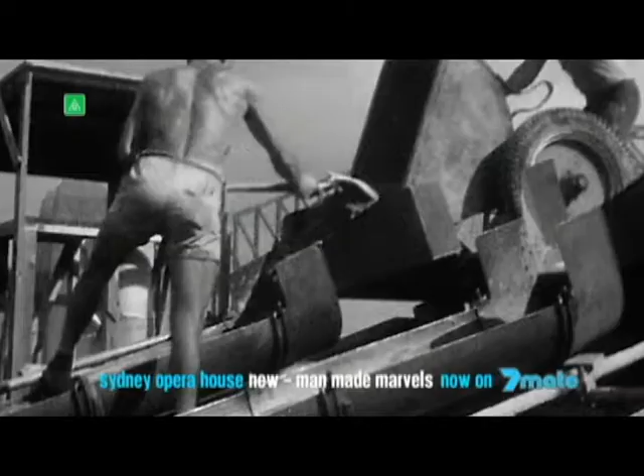Australia's Sydney Opera House, one of the greatest design concepts ever conceived. A shape so complex that it nearly can't be built. A construction process on the very edge of impossible. But the history of this building is more than one of concrete and steel. It is the story of a broken dream, a fallen hero, and a final chapter that is about to be unfurled.

Sydney, Australia, bustling modern super city, lifestyle capital of the world. Beaches, suntans, and a giant glittering harbour as the city's beating heart. But mention Sydney to anyone, and it's not this they think of. It's this, a building that both defines and is defined by the city that surrounds it.

It's awesome. Beautiful. It's gorgeous. A very good place for me. It's like some kind of alien bases or something.

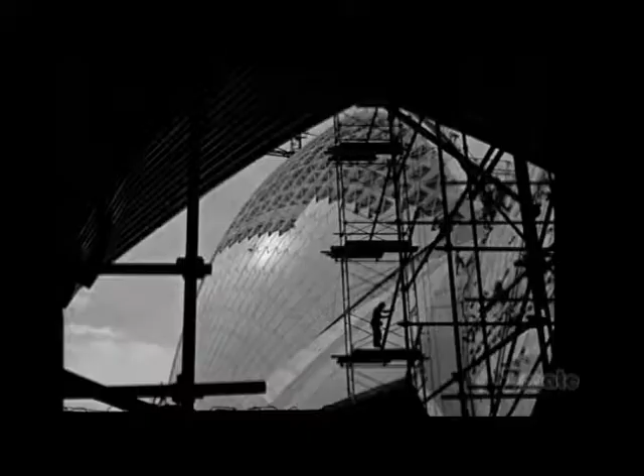Designed nearly 50 years ago, it is a building that rewrote the record books, changing not just the way we design buildings, but how we build them as well. Couldn't have been built at any other time. It actually extended the boundaries of imagination for architectural form.

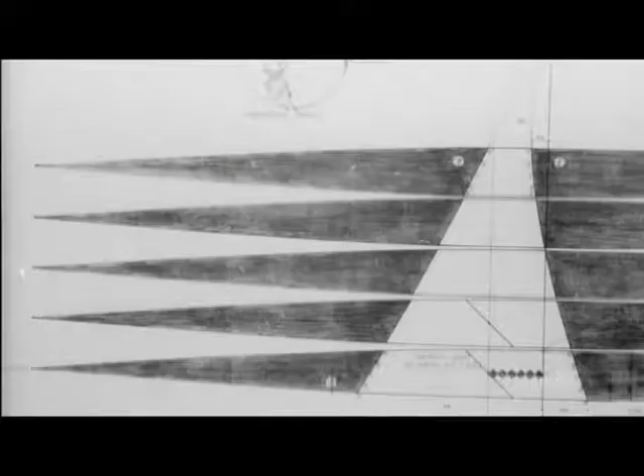The shells alone will take 150,000 man-hours to design. This is more than just an engineering riddle. It is an engineering nightmare. Yet from the most complex of problems will come the simplest of solutions. Having worked on that job, from then on, I always knew that I could solve the most complex of engineering problems. You just know. A solution that will change forever the borders of impossible.

Designed by Danish architect Jorn Utzon, the human story of the Sydney Opera House is one of triumph, drama, and heartache. Of challenging the very laws of nature. If he came up with a better idea, he had no hesitation of scrapping all the previous work. He wanted perfection. You had to create something like a sculpture which could be seen from all sides. It sits in a harbor with buildings of a square character, and you don't want to have the name Opera House written on it. You want to see this is an opera house like you see this is a church.

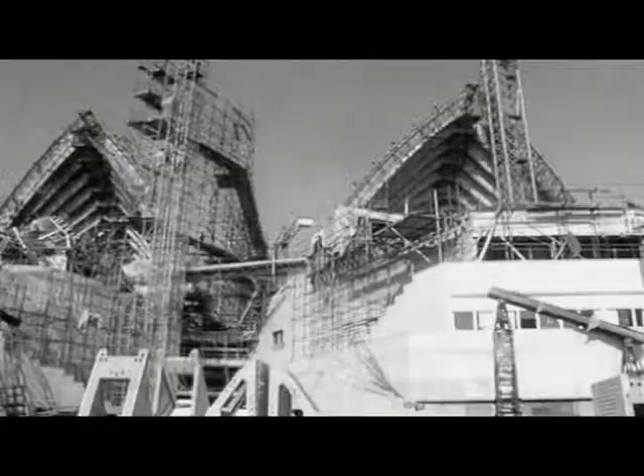But behind the story of the masterpiece is the story of the disaster. He wanted to do things one way, the government another. Budgets blowing out by 1,500%. Timelines stretching from 5 years to 14. And a visionary architect who doesn't just leave the building, he leaves the country.

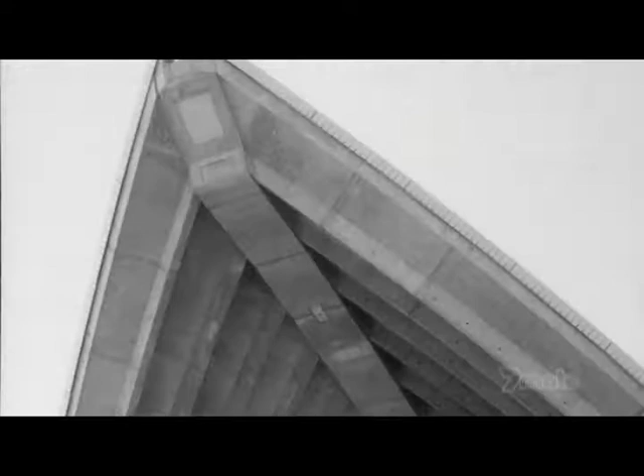Well, I wonder if you ever lose a child, if that ever goes. I doubt it. This is Jorn Utzon. There's in fact nothing I would like more than to come back and finish the opera house as it was conceived. And to this day, the mastermind, Jorn Utzon, still hasn't seen the building finished. That building was his life's work. And to be deprived of finishing it was, you know, it broke his heart.

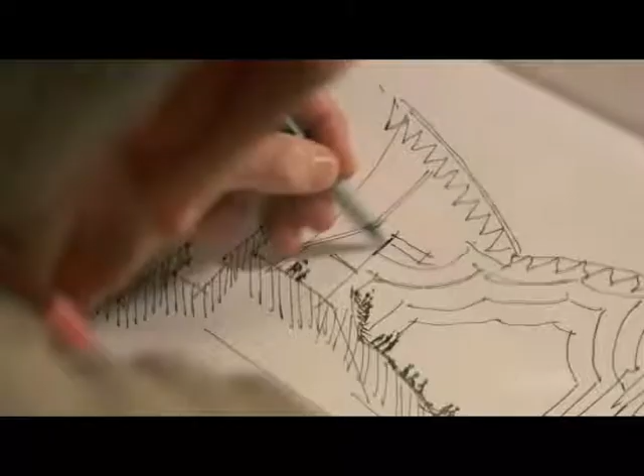30 years after their ruin, Jorn Utzon's broken dreams are about to be rebuilt. There were some compromises, and those, I think the time has come to fix those. Future plans coming not just from the man himself, but from his son as well. They asked my father, would you please consider coming back and help us with this problem? Jan Utzon, an accomplished architect in his own right, is helping to devise schemes that will see his father's creation flourish, not just for the coming decades, but for the coming centuries.

But who was Jorn Utzon, and what makes him so special? Architect Rick Leplastrier is one of Utzon's employees and close friend during the construction of the Opera House. To him, it's not just about design, it's about perspective.

Utzon had an incredibly good understanding of nature. He had a structural understanding of it. He also had the understanding of how we feel in its presence, whether it's on the flat plain of the sea or whether it's on the windy ridge or whether it's down in the dunes. He had an understanding of the feeling that impacts upon the human personality.

Consulting Sydney Harbour marine charts, and without having ever set foot in Australia, let alone the proposed construction site at Bennelong Point, Jorn Utzon develops his scheme. If you saw a list of all the stuff that's needed there, you'd say, how the hell can I solve this complex problem? But he said, no, we make a platform. The platform houses all the interstices of the workings, where the artists prepare. The top of the platform is where they perform to the public, and the roof is the shelter. The benefit of this approach is that the building does more than just fit the landscape. It becomes the landscape.

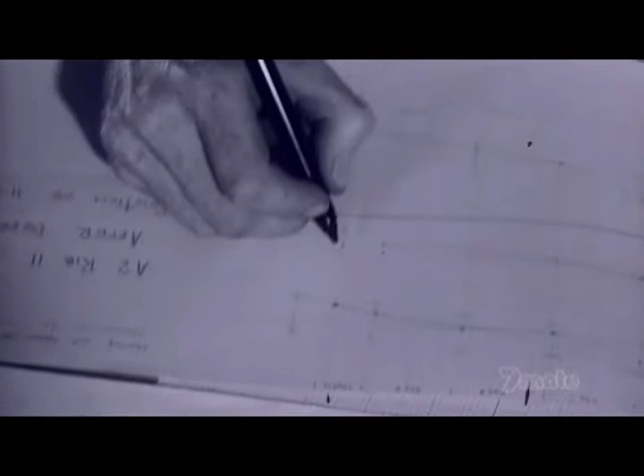John Nutt's team of engineers are a group of remarkable maths and physics wizards charged with giving structure and strength to Utzon's amazing design. The whole thing in this building is that architecture, engineering, construction all merge into one. So you never quite know where the boundaries of one are. And that's one of the aspects of great architecture.

Unlike a regular building, where strength can be found in simple straight lines, vertical walls and geometric angles, the sails of the Sydney Opera House are a maze of curves and complex geometry.

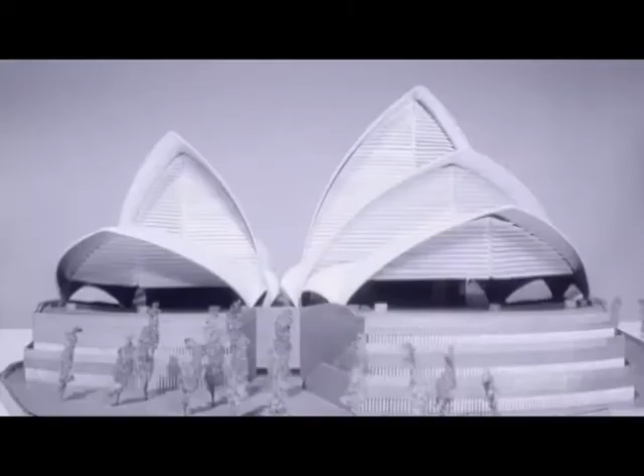The ideal form for the Opera House is some kind of shell structure. But making one that's both 20 stories tall and strong enough to hold its own weight has simply never been done before. On this job, there are a number of things that didn't work as far as the curvature is concerned.

For instance, if you look at the ridge lines, there's a ridge line and it's a very sharp one. Shells don't like that. When you look at the shells, they come down and they're sitting on points. Didn't like that. If you look at the shells, he's having very large curvatures where the weights were heaviest, and it doesn't like that.

Engineers are in a catch-22: how to make the sails of the Opera House light, elegant, and strong? The answer lies not just in materials, but in geometry.

A shell structure is like an egg. If you want to break an egg, you tap it. But you can actually squeeze an egg really quite hard without breaking it. Because all the forces are in that double curved shape, it doesn't break.

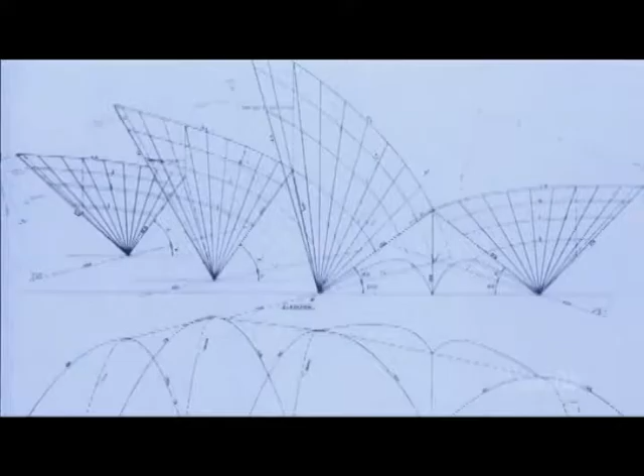The curves of the early designs are incomplete, leaving them vulnerable to collapse. Over a period of 3 years, nearly every geometric trick in the book is tried, tested, and failed.

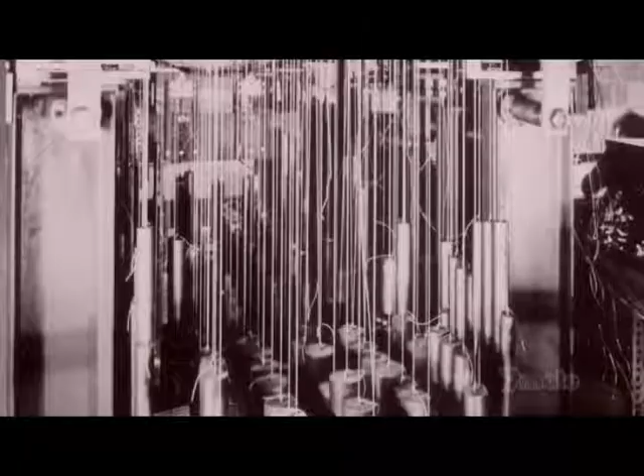Elaborate structural tests are planned. The shape has to allow weight and force to be distributed evenly across the building structure. The task is so big that some of the world's earliest computers are used to crunch the numbers for the first time ever in a construction project.

For Utzon, the pressure is immense. Although guideline plans for the base of the building have been started, they can't be finalized without knowing what's going on top.

And if a solution to the sails isn't found, then the Sydney Opera House, arguably the most groundbreaking design scheme of the 20th century, simply won't be built.

In 1958, Utzon meets with key Opera House politician Joe Cahill. Cahill faces a political massacre at his next election, and his opponents are certain to drop the entire Opera House scheme unless construction has already begun.

Utzon is faced with a dire conundrum: start building before the plans are ready, or don't start building at all.

Construction manager Malcolm Nicklin is in charge of the Opera House site as excavations begin. For a man whose life largely revolves around details, starting work on the job prematurely is anything but easy. You can't start building a huge project like that until you've sat down and done detailed designs.

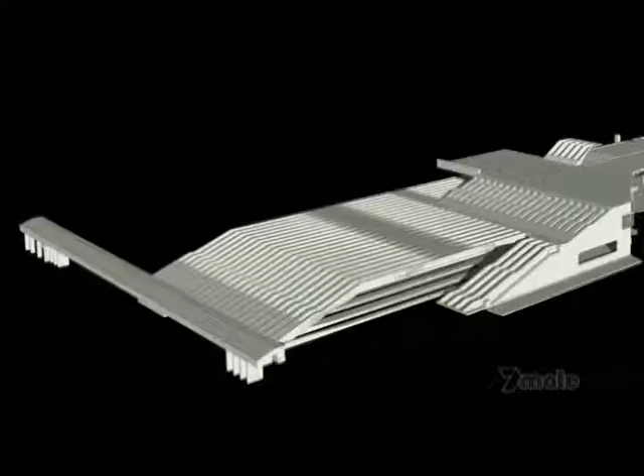The unique roof of the Opera House requires a carefully planned base on which to sit. But because engineers are still struggling with the design of the sails, Jorn Utzon can't finalize plans for the rest of the building below.

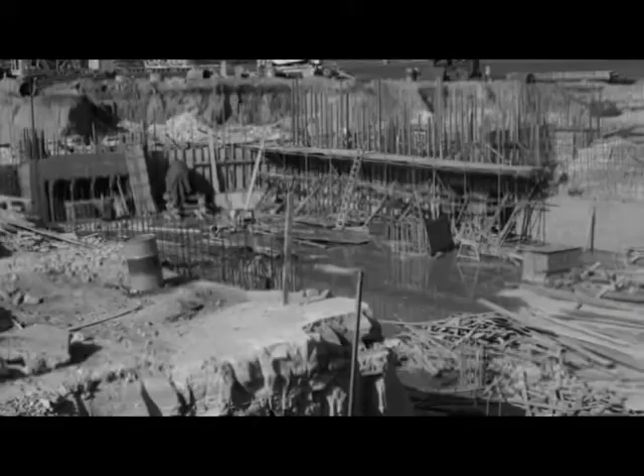All I saw were freehand sketches of the so-called sails. I thought, my gosh, how on earth do you design them and how do you build them? As far as I knew, nothing like that had ever been built before. So there was a learning curve to climb. There were new technologies to be found. And the time available just didn't seem to be enough to me.

On the 2nd of March 1959, only 2.5 years after the design was conceived, a ceremony is held to mark the official start of construction.

Left with no choice, Utzon has selected what he thinks will be the lesser of two evils and started building before his plans are ready.

The design was being developed as they were building. Now that's a disaster normally. I hope that doesn't happen to other people.

Despite the lack of information, early construction moves forward on stage 1, the podium of the Opera House. Ian Mackenzie is the on-site engineer charged with turning the complex design and engineering drawings into construction plans. And faced with scant information from day one, his task is a huge one.

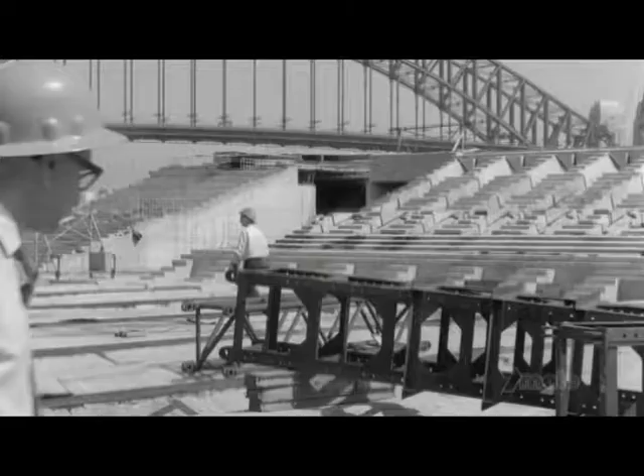Engineers are forced to use estimation and assumption rather than research and fact. There were probably half a dozen preliminary drawings, and that was all. In fact, we were digging in the middle of the area that we knew had to be excavated for the basement, but there wasn't any firm indication as to how much we had to extend the pit.

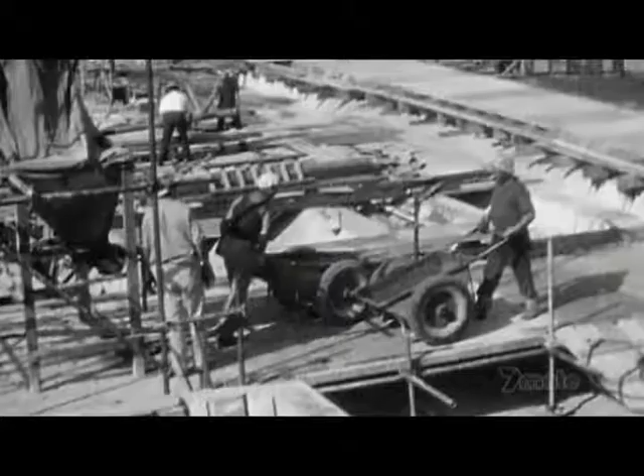By late 1962, Stage 1 is well underway. Already, the Sydney Opera House is behind schedule and well over budget. No viable solution to the design of the shells has yet been found, and if one doesn't arrive soon, then Utzon's dream and the building itself will rapidly turn into a nightmare.

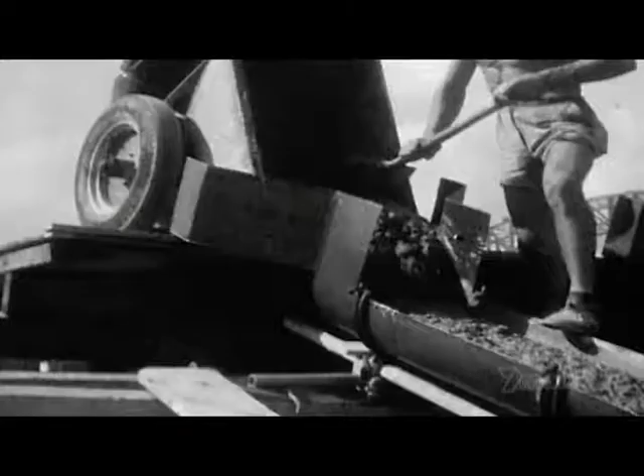It was like the blind leading the blind. I hesitate to say that, but it was, you know, and a fair bit of trial and error too. Really, it started somewhere between 1 and 2 years earlier than it should have.

Design engineers are finding it impossible to create delicate-looking curves that will stand their own weight, let alone the forces of nature. The design of the Sydney Opera House requires multiple sails of different-looking shape and size. But different looking doesn't necessarily have to mean different entirely.

Ironically, the solution to the riddle of the Opera House sails lies not in complexity, but in simplicity, in the purest and strongest curve of them all, the sphere. Spheres are inherently strong because of their even surfaces and curvature. This allows weight and stress to be passed around the shape evenly, spreading loads and forces across the whole structure rather than specific points.

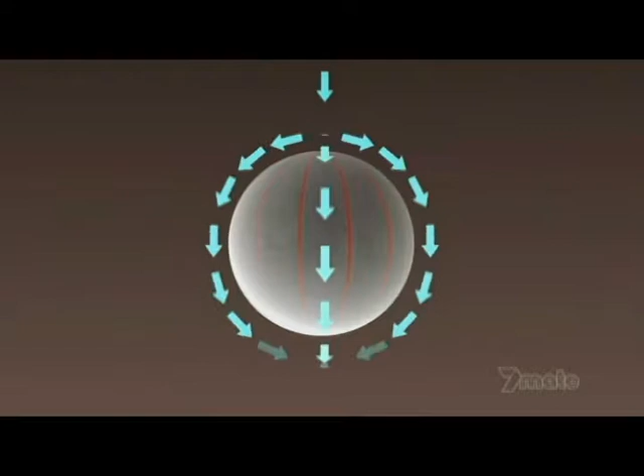Legend has it that the answer to the riddle of the sails comes from the simple story of a man peeling an orange in a work break. He realizes that by changing the angles and size of peels from the one orange, shapes can be created that look dramatically different, but aren't. Every different sail of the Opera House can be made not just from the same concept, but from the exact same sphere. Anybody can make a complicated thing look complicated. The clever thing is to make a complicated thing look simple.

The keys to understanding the most dynamic-looking building ever made have just been found. The man with the orange, of course, is Jorn Utzon.

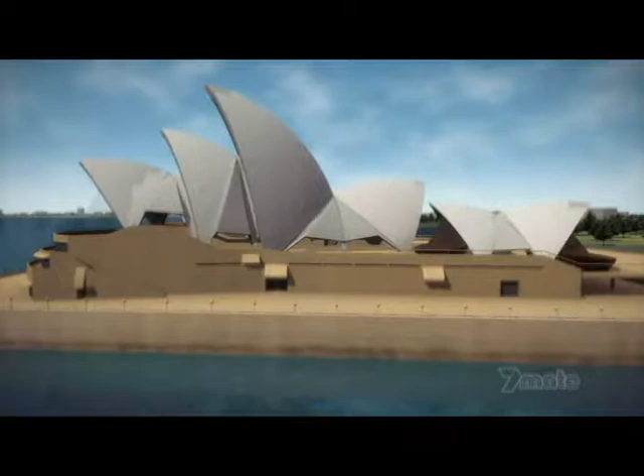Construction of the Sydney Opera House takes place in 3 stages. Stage 1, the base of the building, or podium. Stage 2, the sails. And Stage 3, the interiors.

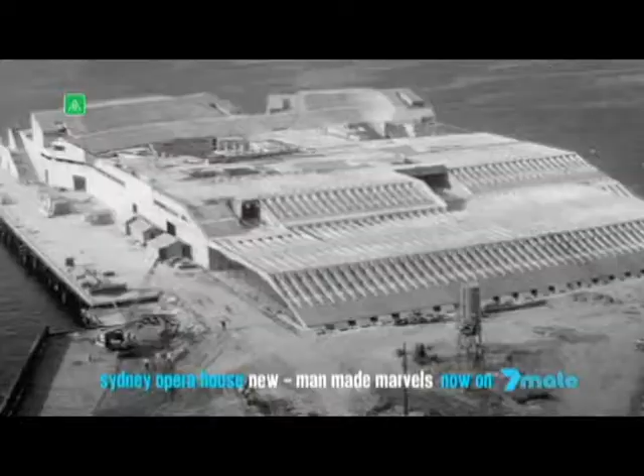The so-called spherical solution allows architects and engineers to complete the podium and begin preparations for Stage 2. For Utzon, one of the greatest obstacles of his life has been overcome. If we could build these enormous shells of small prefab elements and just have to assemble the whole thing on the site, the sails will be a milestone in his career.

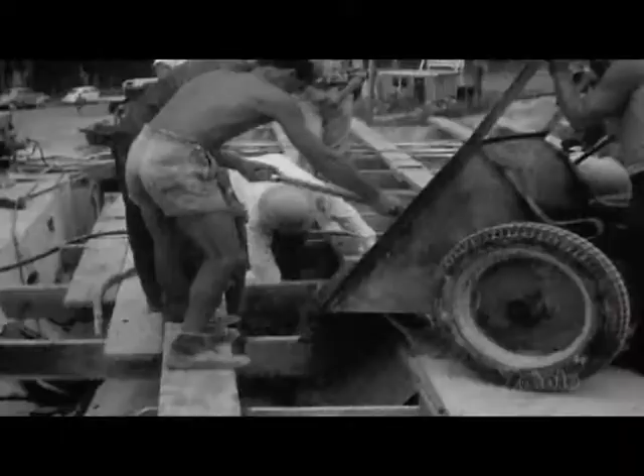The podium of the Sydney Opera House is made largely of concrete, moulded in position using wooden formwork. But the size and shape of the Opera House sails makes applying this type of technique next to impossible. Like many things to do with the Sydney Opera House, the solution to this problem is both incredibly simple, yet incredibly complex to put in place.

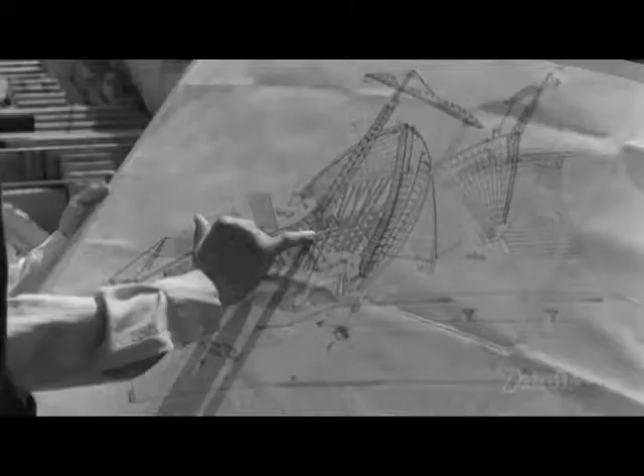Because each sail is now the product of a sphere with exactly the same radius, their form can be broken down into a series of geometrically identical segments, or ribs. Ribs of different lengths can be joined, creating shapes that look dramatically different, but aren't.

Only really when the design changed to a spherical form was it realized that you could then get repetition. You didn't build it as a shell, you built it as a series of ribs. Much like Lego, the ribs themselves can then be made of smaller segments. The more segments, the longer the rib. Ribs of different lengths make different shaped shells.

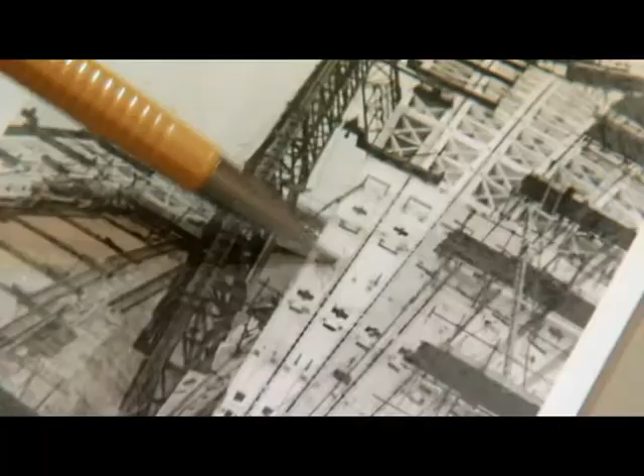The Sydney Opera House isn't just a marvel of design, it is a marvel of construction as well. John Kuhner is a construction engineer overseeing the erection of the Opera House sails, turning piles of concrete and steel into a solid integrated roof.

If you're doing things in the vertical situation, it would have been a lot easier to start there, but life is not that easy. You had to start where you started. And that was, I think, a degree of difficulty that nobody anticipated.

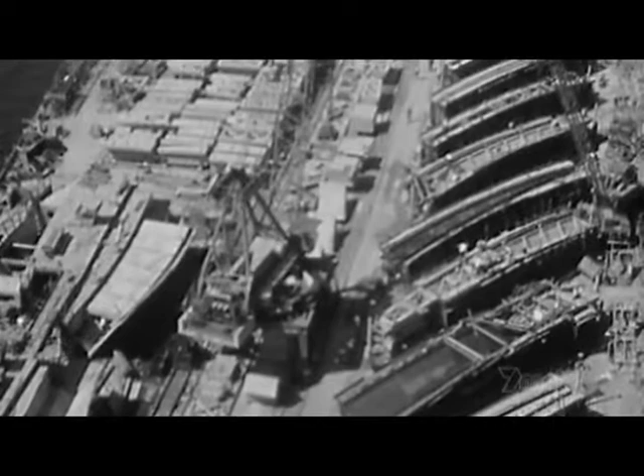The challenge is to create a construction method that will allow both precision as well as mass repetition. To do this, engineers precast the rib segments in giant molds on site, producing over 2,000 individual segments in a process known as continuous casting.

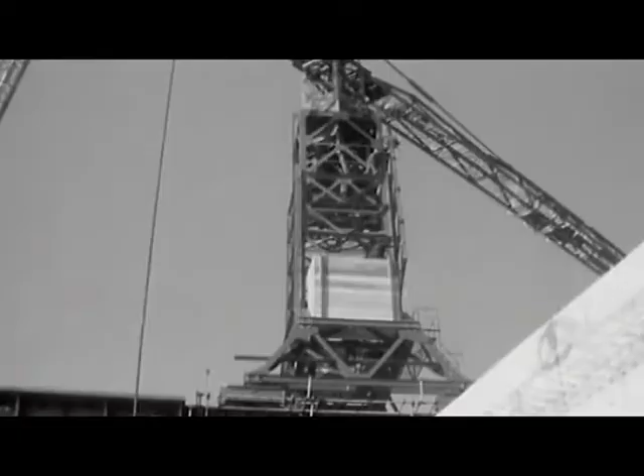Normal cranes and vertical erection methods will not work with a building like the Opera House. A unique curved erection arch is designed to work on multiple angles and heights, lifting each rib segment into place and following the growing shell in a continuous workflow.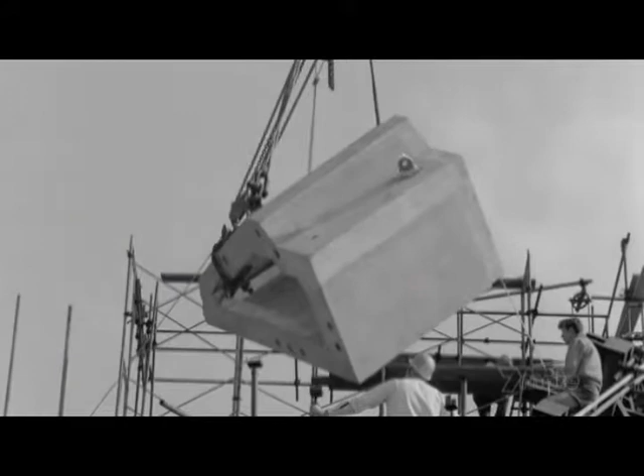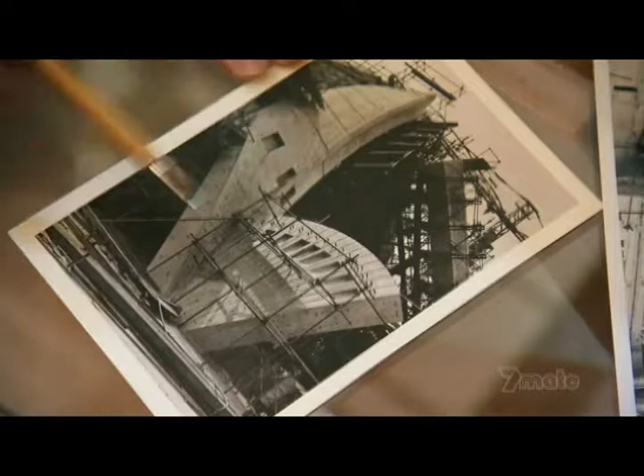But as an entirely new process, it's anything but easy. First experience we had was actually erecting this particular segment here, and that was a segment that would be erected on the side shell arch. That was the first one that went in. That probably took us 2 days to prepare for it. Once we got it in, we sat back and said, great, it took us another 3 days before we got the next one in. And after that, we gradually worked and became more efficient.

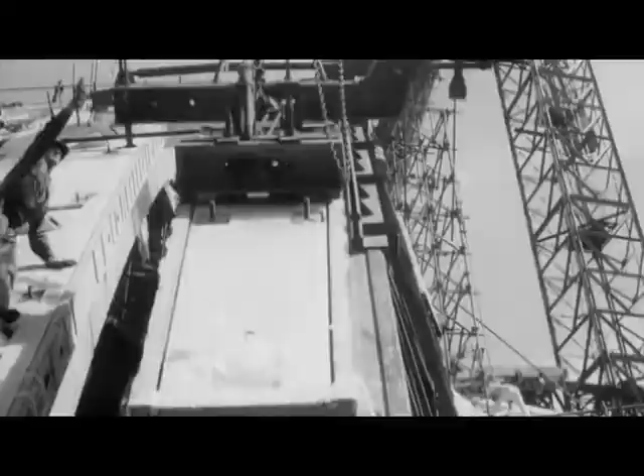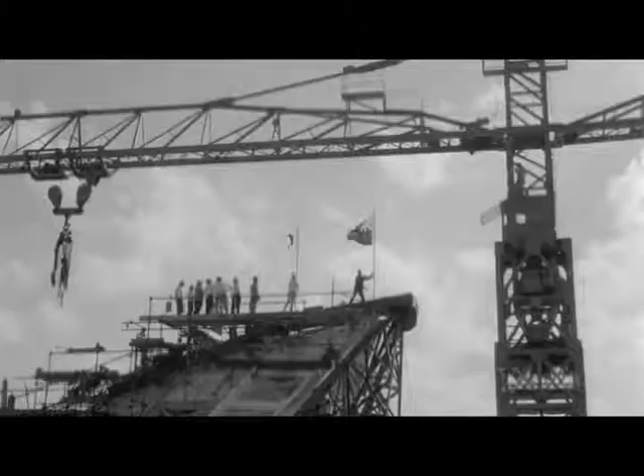Six years into construction, the unmistakable form of the Sydney Opera House is taking shape. Remarkably, the largest shell is finished to within an accuracy of less than 12 millimeters. But the many challenges of building this amazing structure are far from complete.

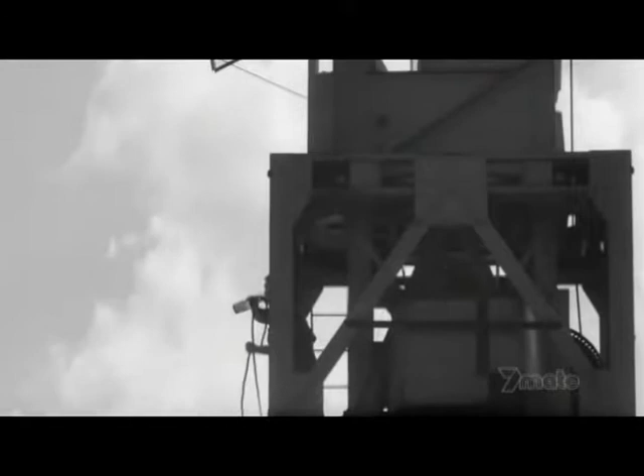John Kuhner and his colleagues have refined their techniques, from only placing one rib segment every 3 days to placing up to 14 in a single day. But despite their efficiency, the curves and complexity of the Opera House make it a dangerous place to work.

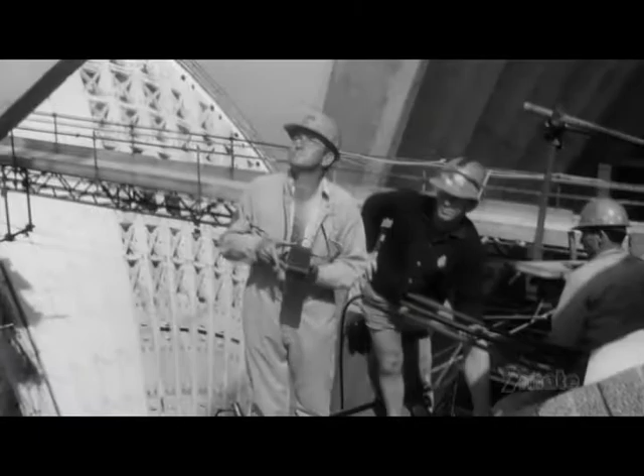And disaster can strike when you least expect it. Normally you would strap this arch back to the ribs that have been erected behind. And for some unknown reason, all the supports had been taken off because there was no weight on them and the arch was just standing there.

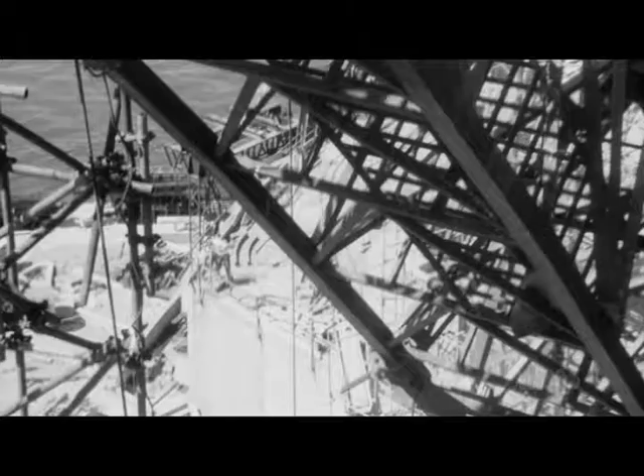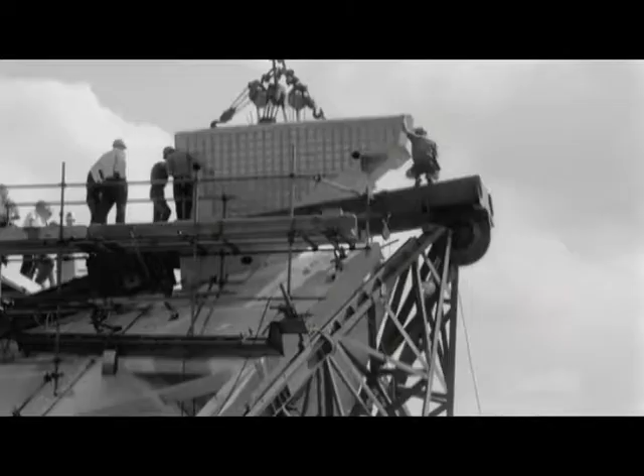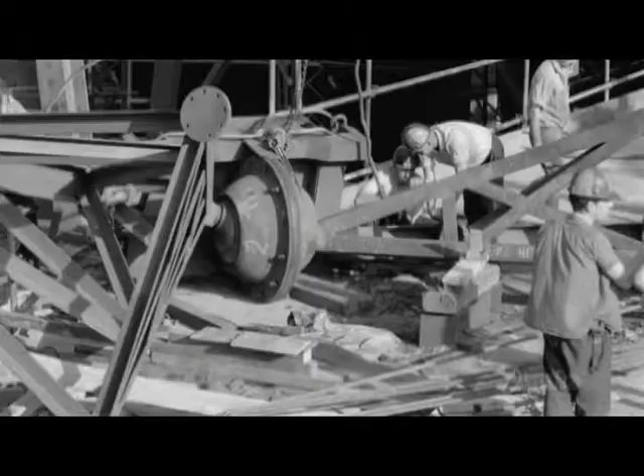The massive erection arch is left dangerously unsupported. A gust of wind came and half the arch flipped and sheared the joint at the top. The entire top section of the erection arch plummets to the ground. Miraculously, no one is killed. Something that we should have foreseen. It was one of those things that happened. Fortunately, nobody was hurt. The accident serves as a valuable reminder.

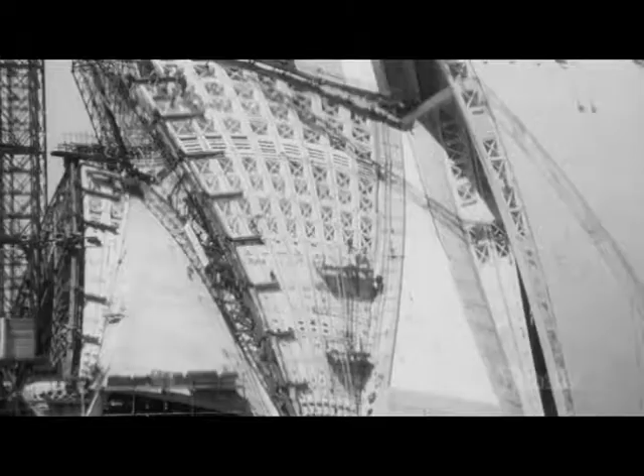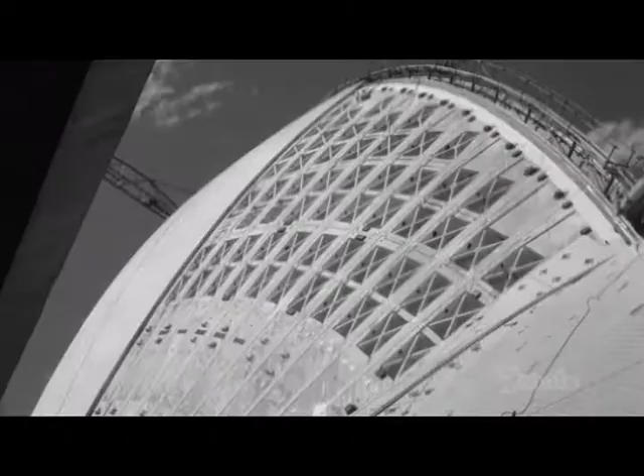The remarkable shells of the Sydney Opera House sail dangerously close to the unknown. Utzon's vision for the exterior of the sails is to create something that will last under the harsh Australian environment, but will also respond to the changing mood and light around it, like a mountain capped in glistening snow.

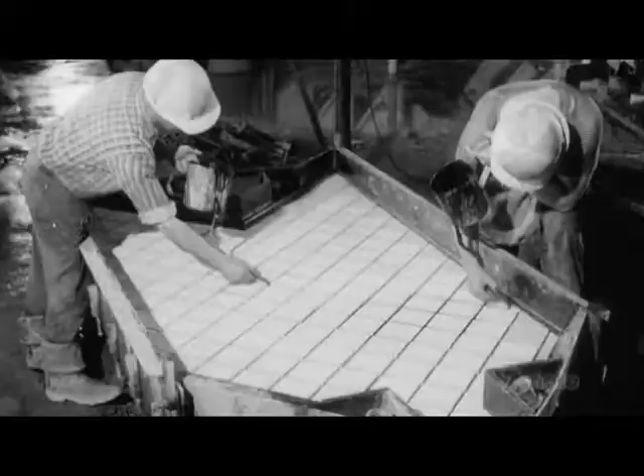Ceramic tiles are chosen for both their durability and texture. But to gain the right look, they have to be arranged in complex diagonal patterns. To do this, over 1 million ceramic tiles are laid on pre-molded plates before being placed on the sails.

Pattern, texture, and color combine. Many pieces, one effect.

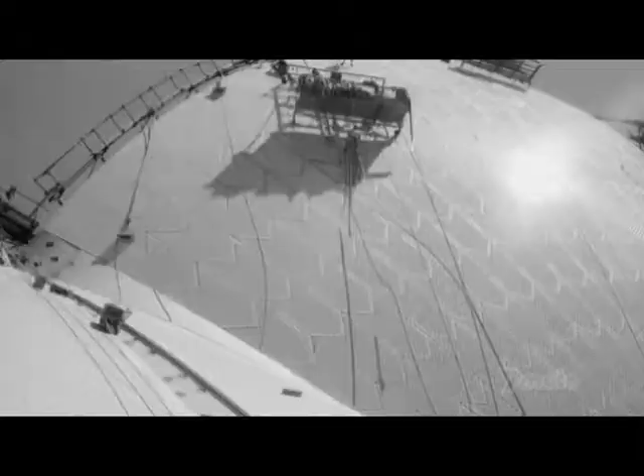Bit by bit, the sails of the Opera House grow. The skyline of Sydney is being changed forever. For Utzon, the realization of his dream is in sight. But dark clouds are building.

For three years, Utzon has been developing complex plans for the Opera House interiors, bold schemes using plywood as a key ingredient.

But despite progress, his plans are behind schedule, and many believe that the job has simply become too big for one man. He found it very difficult to delegate. It was his project. It was like Michelangelo and the Sistine Chapel, I think.

Sydney architect Michael Tomaszewski is working for Utzon as negotiations with the state government of New South Wales, the body paying for the Opera House, begin to sour.

It was the most exciting building in the world at the time. And to have the opportunity to work on the building and to work with Utzon was an amazing experience of a lifetime. Utzon's plans for the Opera House interiors involve complex shapes, materials, and procedures, all of which require extensive research and planning to develop.

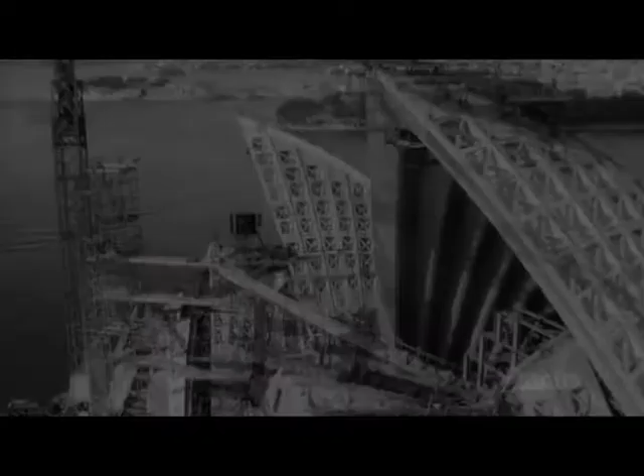Jorn Utzon's departure from the Sydney Opera House design team leaves the future of the building in jeopardy. Groups of local architects and Utzon supporters protest and lobby in the hope that he can return. Utzon himself writes letters asking to be reinstated, but it's not to be.

Having worked on the project for about 9 years at that time, he was convinced that it would be so hard for somebody else to take it over that the government wouldn't dare to sack him.

To many, not the least Utzon himself, the situation is a disaster. It's impossible to make any conditions for my return. I must negotiate, and I'm very willing to do this.

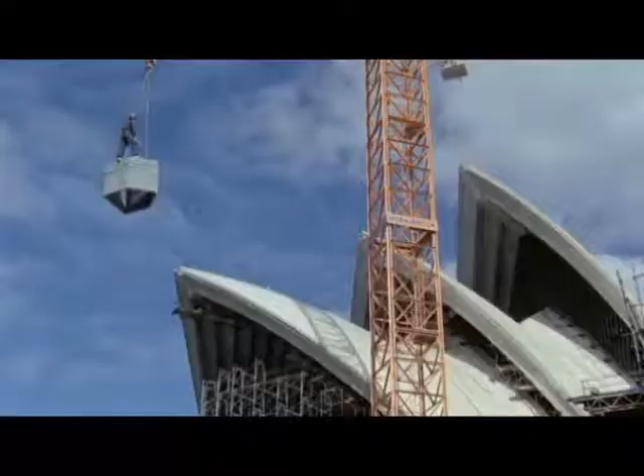A team of local architects, led by Peter Hall, are charged with finishing the job. But the task ahead of them is a huge one. As a matter of urgency, they have to learn every detail and concept behind one of the most complex buildings ever designed. And controversy and criticism hound their every move.

If Matisse had a painting incomplete, who would ever finish it? Picasso wouldn't have dared, huh? Let alone Pro Hart, right? It would have been a bloody disaster.

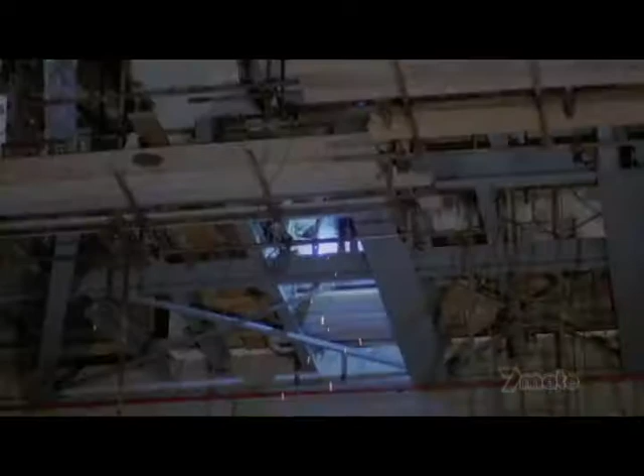Utzon's elaborate plans for the interiors of the building are scrapped and replaced. Purpose-designed stage machinery demolished.

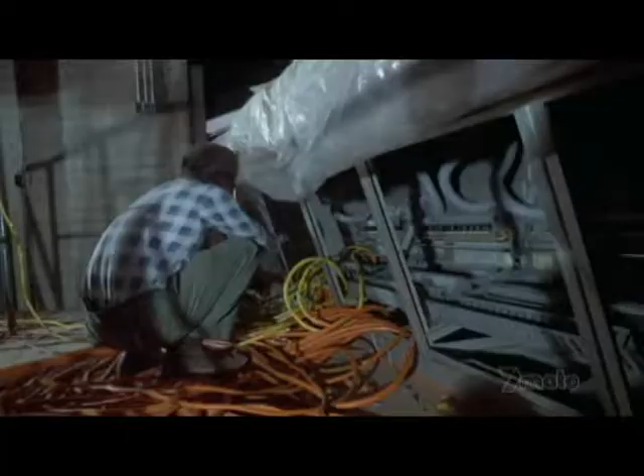If I've got a regret, it's that the building wasn't left there then in that situation as $21 million worth of sculpture, and they'd taken the 80-odd million that they still had to spend to get it complete, found another site, put up a totally functional building and had an opera house there. So you'd had an opera house and a sculpture. That would have been great, but...

For Utzon, it is his darkest hour. My interiors were created before the exteriors, and they are one thing. You can't separate them. So you will destroy the harmony in the building and the flow of the spaces completely when you're altering the program.

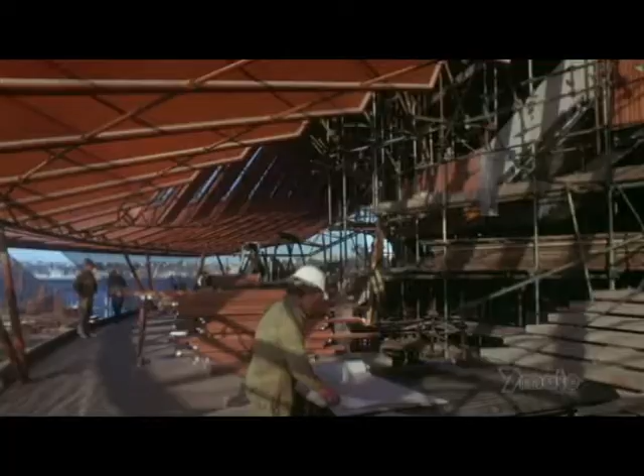But like all truly great monuments, the structure itself rises above the time and the mere mortals that create it. Construction continues, and over a period of 7 years, the Opera House inches forward. Finally, on October 20th, 1973, after 14 years of construction and $100 million, the Sydney Opera House opens.

The dramas and the difficulties seem to fade. But as brilliant as it is, the interiors of the building are not those of its creator. Utzon's vision and plans have been changed substantially. And for many, although construction may be finished on the building, the masterpiece is not yet complete.

Andrew Nichol is an acoustician specializing in designing large performance halls. According to him, the opera theatre, although perfectly fine to look at, is not so perfect to listen to. Compared to other international opera theatres, it has a much drier acoustic, less reverberant.

Like an expert mechanic, Andrew is able to analyze and fine-tune a building, not just how it looks, but how it sounds.

Music needs to blend together to create what we as human beings interpret as a beautiful sound, when all the frequencies and all the notes come together and we recognize that as a sound we enjoy. The sound inside a building is an extremely complex interplay between the size and shape of the space, as well as the materials used to make it.

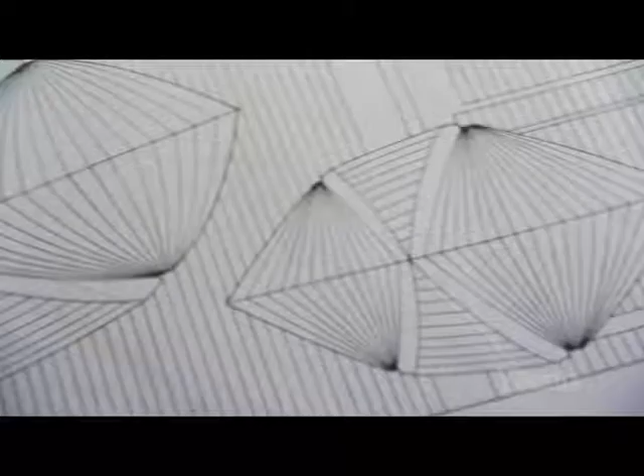Tragically, Jorn Utzon is now too old to travel. But his legacy will live on and ultimately grow. His newly refined design principles will allow the Sydney Opera House to adapt and evolve into the future while still maintaining the vital ideas that created it.

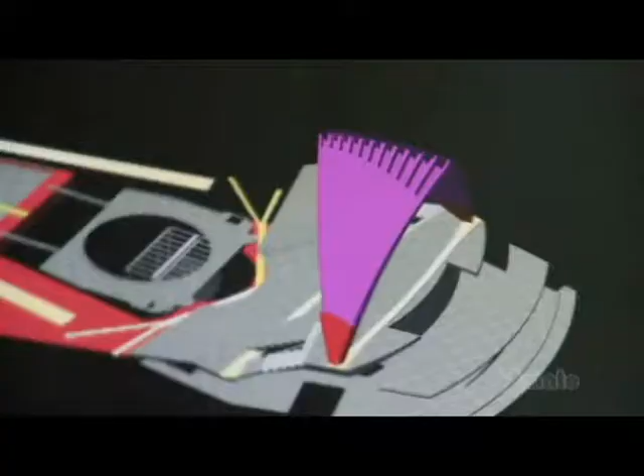If we just invite architects in to do all these changes whenever they have to occur, and new ones, then in 50 years' time the Opera House will not look like the Opera House anymore. But in order for the Sydney Opera House to move forward into the future, its plans must be dug up from the past.

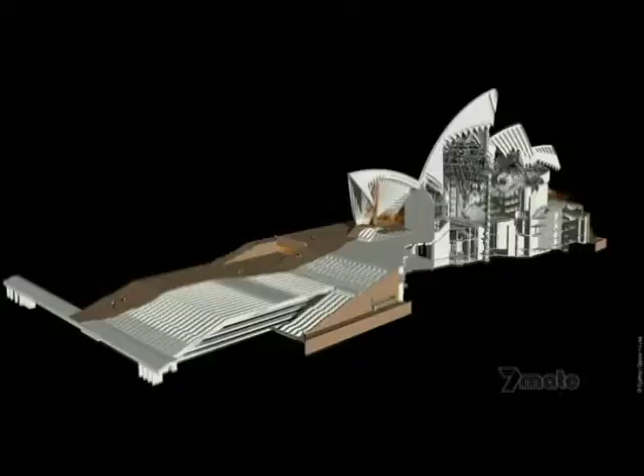Stuart Bull is a young engineer charged with creating one of the most complex digital design models ever made, a complete 3D model of every tiny detail of the Sydney Opera House. It's a bit like an iceberg, a lot more beneath our feet than what you actually see. Already 6 years into his work, Stuart estimates he's still only 50% done. There's nothing that comes close in terms of what I've seen in my engineering life so far.

With the help of Stuart's models, small renovations have already been done on the Western Colonnade, as well as what's now known as the Utzon Room. But the big jobs, redesigning the halls, will be another problem entirely.

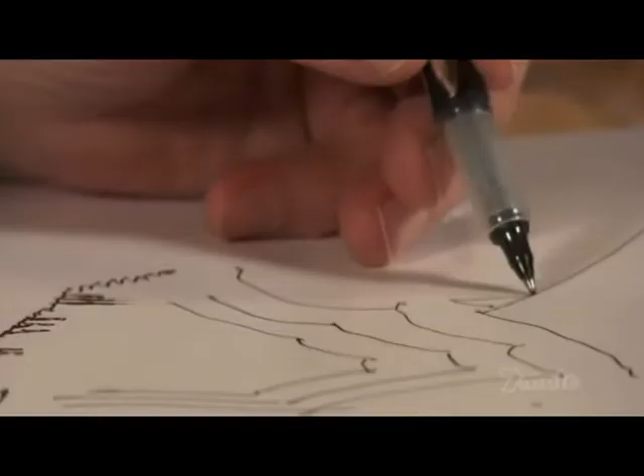The objective isn't to replicate Utzon's original designs, but to expand on them, to use today's technology and ideas to create concert halls for tomorrow. We looked at this, we can enhance it, but it's just like putting lipstick on a face. It's nothing. It doesn't really change anything.

And then we have come up with a project that will drastically improve the venue as a world-class venue for opera. But it involves a lot of work, and unfortunately also a lot of money. Unfortunately for the Sydney Opera House, the very factors that make it unique also make it difficult to modify. If we want to increase the volume of the venue, we cannot go up, we cannot go out to the sides, we can only go down.

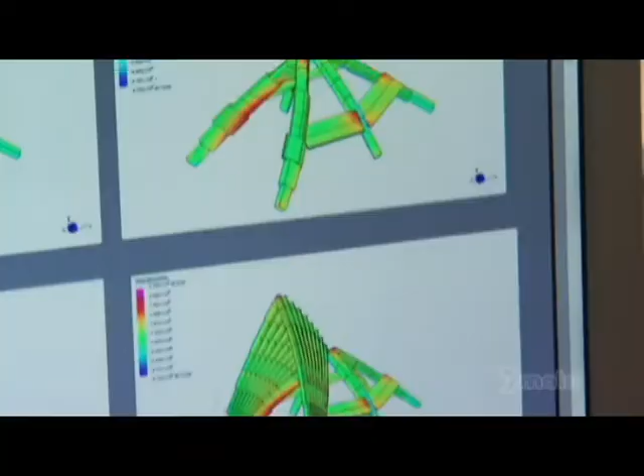Top secret plans are being developed. But with no choice but to dig down, major structural tie beams will have to be relocated, potentially destabilizing the roof. It is now thought possible that you can cut those tie beams and replace them with downward beams that will do the job. And that won't be a trivial engineering exercise. I think it'll be a fascinating engineering exercise in its own right, but it's doable.

The cost is expected to run into hundreds of millions of dollars, and the works may close the Opera Theatre for up to 2 years. But what price for an icon?

Although its past is checkered with controversy and drama, the structure itself outshines it all.

If the few things that now appear to be the greatest crisis of all time, that the place is not good enough, if some of those can be changed now, let's face it, how long are we looking for? 100 years? 150 years? There's a lot more histories to be written, I think, before that.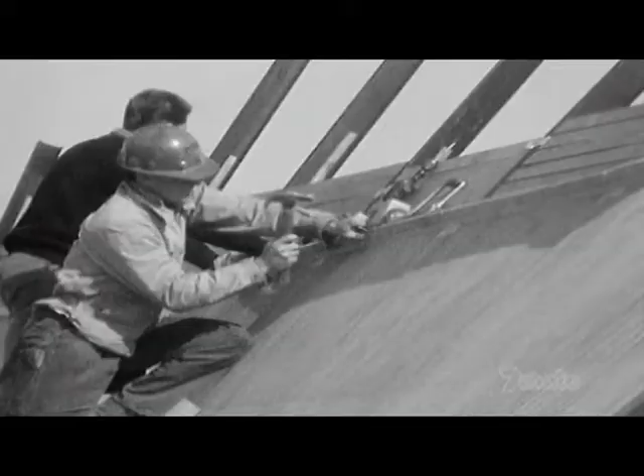He sees the building in his mind's eye and through the photographs he sees in a way that satisfies him. I'm sure somewhere it would be great for him to put his hand on the shells and stand there and feel this building. Jorn Utzon may never have seen his opera house complete, yet his achievement remains.